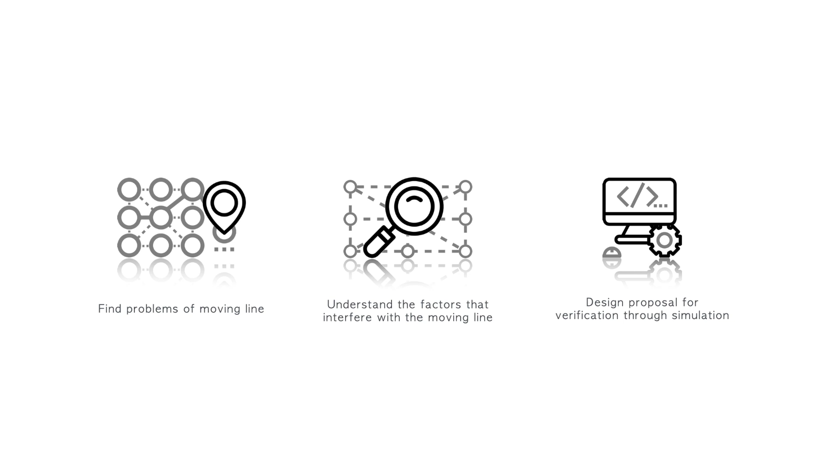The Taipei MRT station, which has an average of 308,000 passengers per day, is also the largest station in Taiwan. The underground second-floor interchange hall is our research base, which is the most complicated place passengers transfer often.

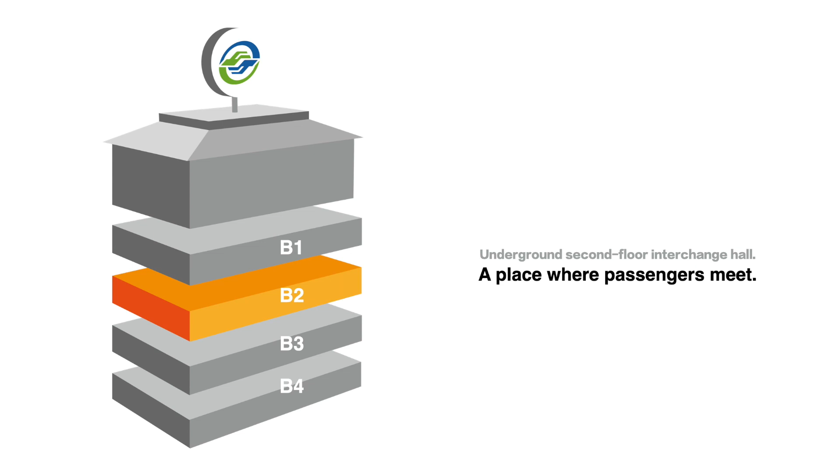Past studies found that there will be more conflict and interference in the 90-degree angle of the road. It's also mentioned that B2 has a higher flow density than the other floors of Taipei Station, so we choose this place as the research base.

This study tried to discuss passengers' moving line, hardware facilities and their transfer process and other environmental objects in space to explore the relationship between them.

Then discuss their transfer route from start to end point, with their reaction from interference behavior at B2 interchange hall. Based on what we observe, making some shunt plans by simulation to verify which plan is better.

As we know, the primary goal of passengers is to have a clear route and to reduce the interference of walking.

In MRT stations, we often see the use of shunt fences to guide passengers to walk on the moving line, to reduce conflict, but the ratio of space capacity to crowd flow should be taken into account to avoid queuing.

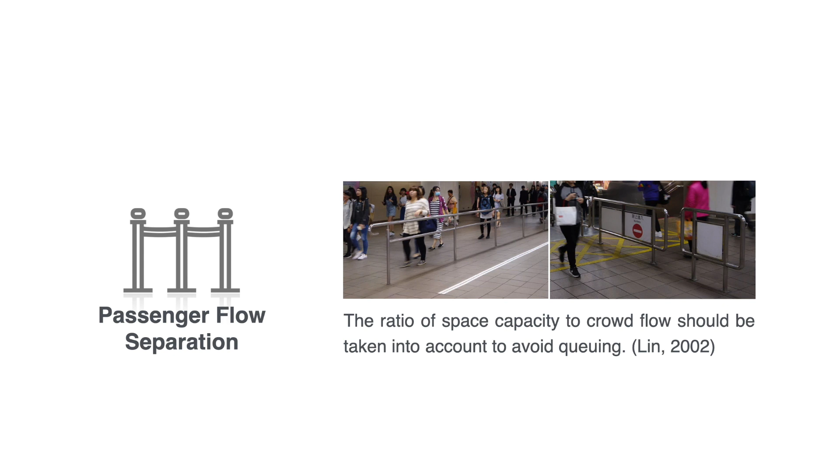In a crowded situation, pedestrians tend to choose the shortest route, but not the fastest route. Passengers try to slow down when disturbed in the same direction, and change their direction when interfered with from the opposite direction.

We used non-participant observation, choosing B2 of MRT Taipei Station as a base to observe passengers' routes during rush hours. I used a camera and followed each passenger from the start to the end point, observing how they walk along the way, where the disturbed behavior occurs, and where they end up. Total of 320 passengers.

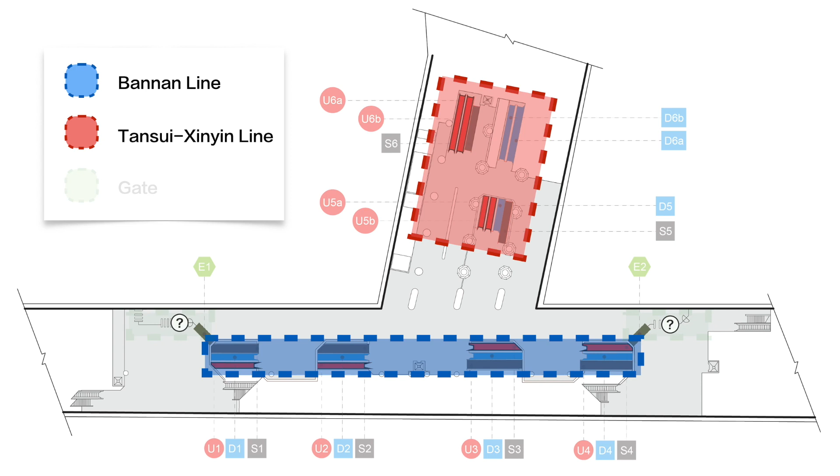The blue area is Bannan Line, the red area is Tamsui-Xinyi Line, and the two green areas are gates. We chose 6 start points: U1, U2, U3, U4 of Bannan Line, and U5, U5B, U6, U6B of Tamsui-Xinyi Line. Each start point has its own upward escalator.

The 6 endpoints all have a downward escalator: D1, D2, D3, D4 for Bannan Line, and D5, D6 and D6B for Tamsui-Xinyi Line.

Gates include start and end points. We use E to represent entry and exit gates as E1 and E2. Stairs are also endpoints: S1, S2, S3, S4 for Bannan Line, and S5, S6 for Tamsui-Xinyi Line.

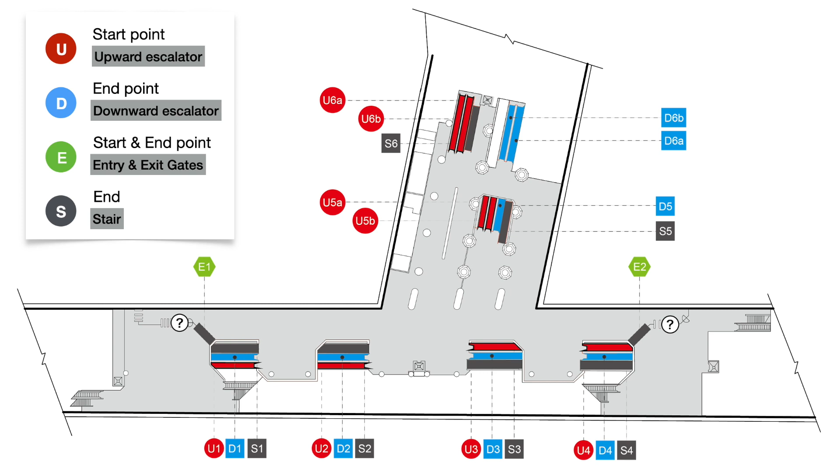So we did 3 non-participant observations as below, then tried to make 3 simulation shunt plans using Unity. Let me talk about what we found from the 3 non-participant observations.

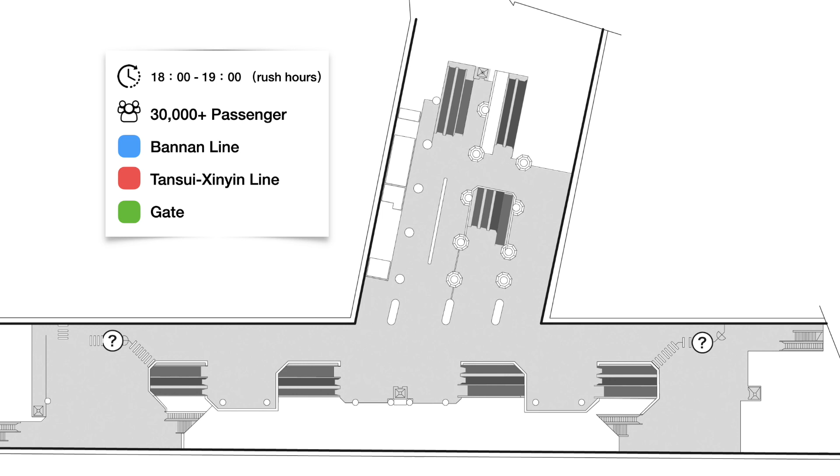When we observed passenger flow at each starting point, of the 4 starting points of the Bannan Line, we found that passengers are almost all from U2 and U3, where diversion is not good. At the start points of the Tamsui Line, the number of people at U6 is relatively large.

There was no difference between passengers arriving from E1 and E2. We found that U2, U3, U5 and U5B had flow of people lasting for a long time with short intervals. The crowds at U6A and U6B of Tamsui Line and ticket gates E1 and E2 were uninterrupted during peak hours.

The blue Bannan line has a single shift of about 300 people. The red one is the Tamsui line. When the crowds on both lines arrived at B2, they almost all overlapped, although the number has decreased over time. When passengers are shuttling between B2 at the same time, it will cause congestion.

So we found a significant difference of flow at the starting point of Bannan line. The crowds will overlap. At the beginning of Bannan line, the flow of U3 people is the largest. The largest flow of U6 people occurred at the starting point of Tamsui-Xinyi line. The larger the traffic at the starting point, the longer the duration of the flow.

Second observation is about choice of destination preferences and transfer moving lines. The first one is the passengers coming up from Bannan line to transfer or leave the station.

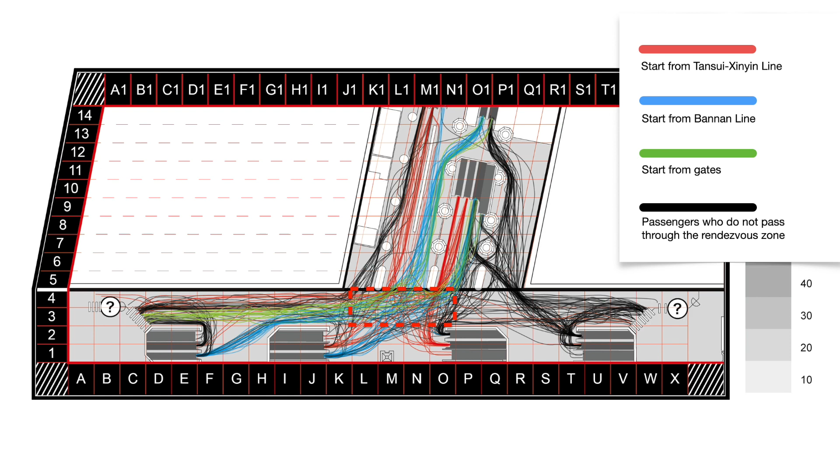Then we count the number of passenger movements and find out the areas where the lines are most interlaced. The darker color means more people there. The T intersection is the most complicated area with moving lines. After all passenger lines have been overlapped, we found that passengers in these two red areas would avoid T intersections.

We know passengers prefer to travel through columns to shorten walking paths and avoid crowds. Passengers departing from U4 and E2 are this type.

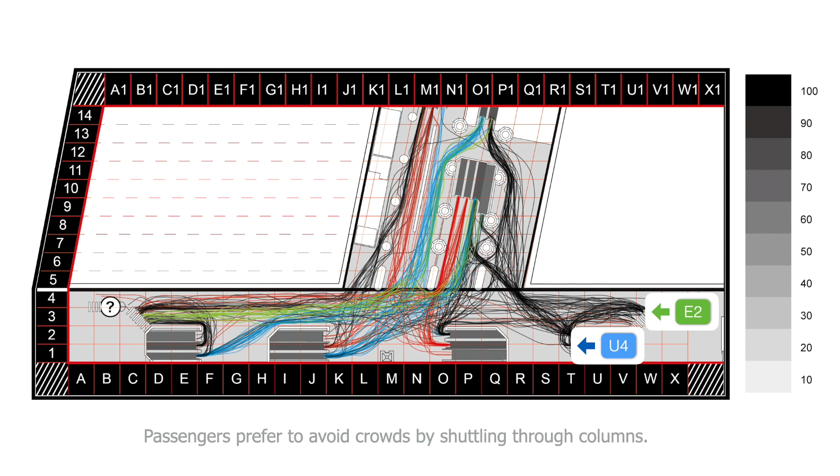If you look at the moving line from the source of passengers, the green line refers to passengers departing from gates, the blue line refers to passengers from the Bannan line, and the red line refers to passengers from Tamsui line. There is most conflict area.

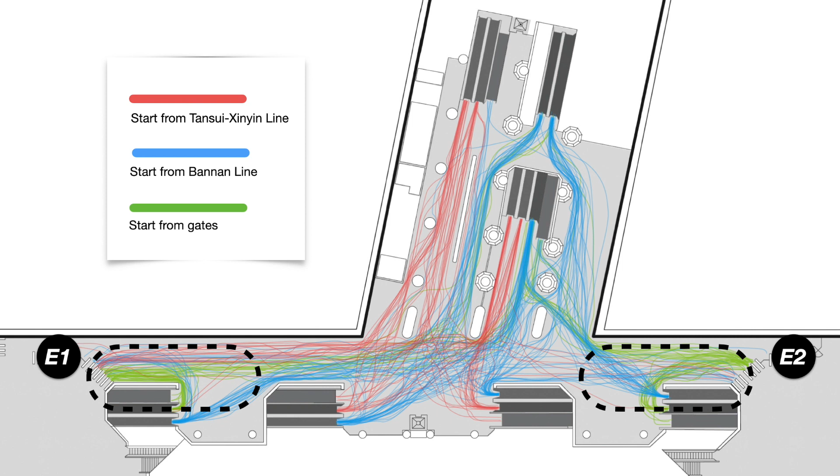The moving line of E2 is more chaotic than E1, and there is a path conflict at the corner. Similarly, in the black line at the corner, there is also an interlacing of the moving line because of different direction of operation of escalators.

So we found passengers choose routes with short distances. The T intersection is the most complicated area with moving lines intersecting. Passengers prefer to avoid crowds by shuttling through columns. The location and operation direction of the facility affect the moving line.

Third observation is about transfer behavior and distribution. When passengers encounter interference, they change their walking paths and slow down to avoid any physical collision.

The starting point U5 has the most disturbed behavior. The most disturbed behavior on the Bannan line is U2, because the starting point of U2 is near the T junction.

U6 is the least disturbed at the start of the Tamsui line, where travelers shuttle through columns to avoid crowds. Those who are departing from E2 are the least disturbed, because people from here don't go through areas that are jammed by moving lines.

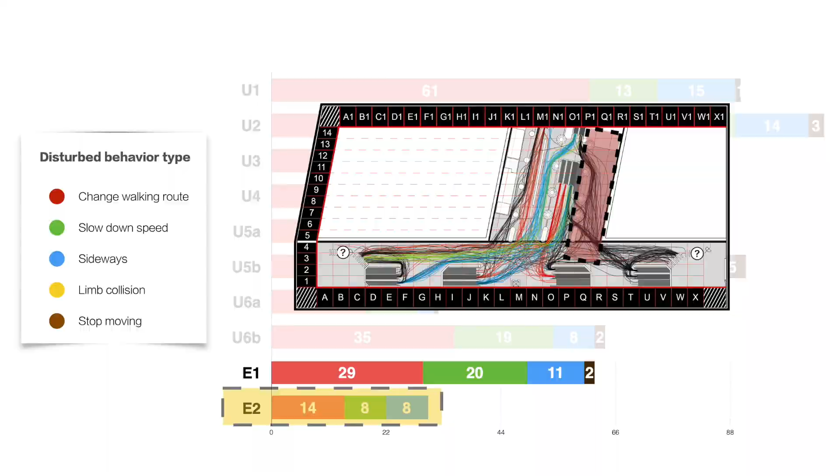If we overlap the 5 disturbed behavior types, it can be seen that most of the acts occur near the T junction and left and right escalator corners. The right escalator is disturbed more frequently.

So we found, when passengers encounter interference, they often change their walking routes. The number of interference behavior near the T junction is the highest. Passenger shuttles through columns to reduce interference behavior. T intersection, escalator entrance, and exit often occur interference behavior. The position of the escalator will affect the interference behavior.

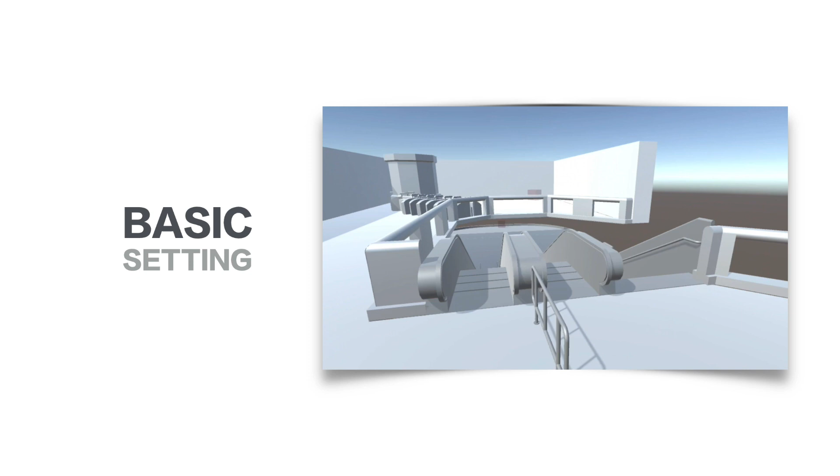After 3 observations, we did some simulation to evaluate any possibility to make it better. I used Unity 3D software to control the relevant parameters. We measured the size of the scene, restored the model of Taipei Station and then imported it into Unity. Then we set the parameters.

Speed setting of the escalator follows national standard rate and regulation. According to previous surveys, the parameters will be set based on the total number of passengers, the percentage of passengers at each starting point, and the interval between passengers taking the escalator.

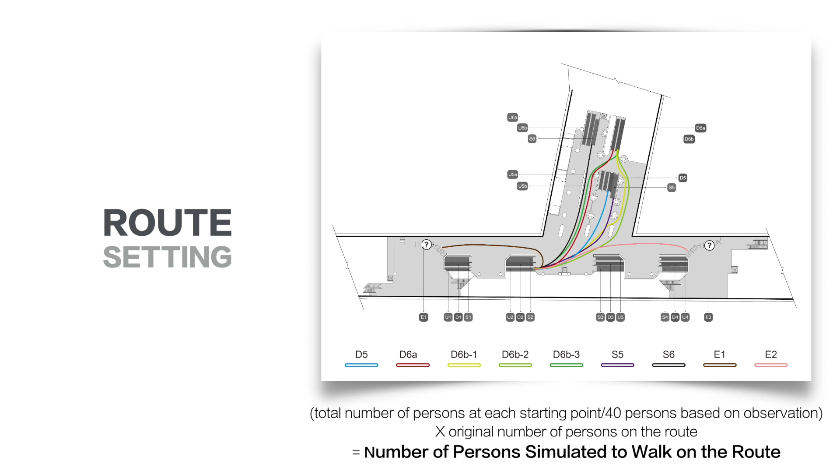Walking paths can be different for everyone. To simulate a traveler's path, we use this formula. Based on the observed route, the route range for a passenger is to use the same route that all passengers have traveled, then draw these paths in Unity.

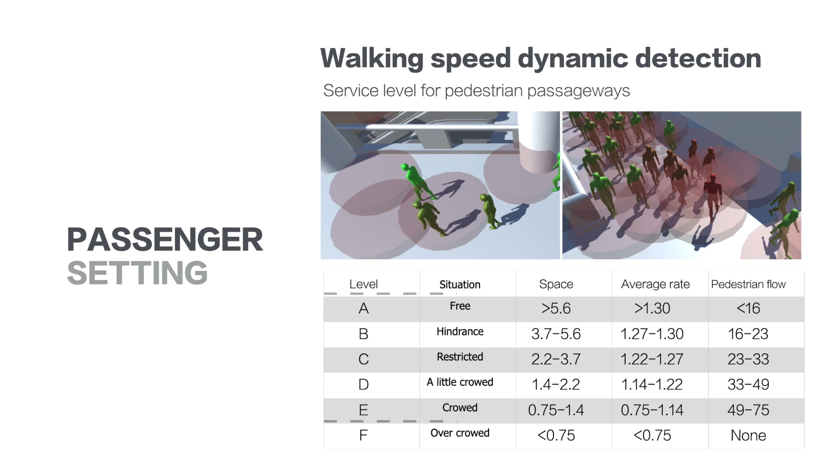How do we define pedestrian walking speed? We used service level for pedestrian passageways to make walking speed dynamic detection. If there's someone in range, the rate slows down. The average speed range of older and younger people is set to be different.

Percentage of passengers choosing to walk on escalators, stand on escalators, and take stairs is based on the simulated period. We know how many passengers have entered the station and transferred to another station, and how many of them at each starting point is also known, to make setting.

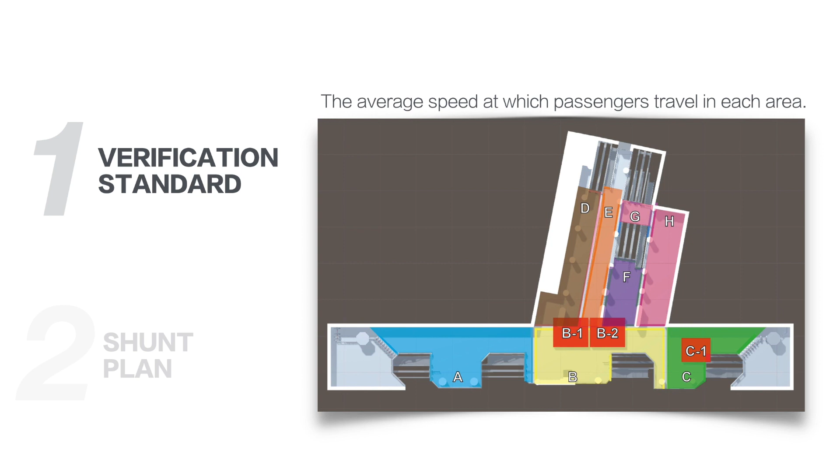The way we set the verification standard in shunt plans is by trying to know passenger travel time between each starting and end point, and the average speed at which passengers travel in each area.

We have 3 shunt plans. Plan A: change the route that interferes with the moving line.

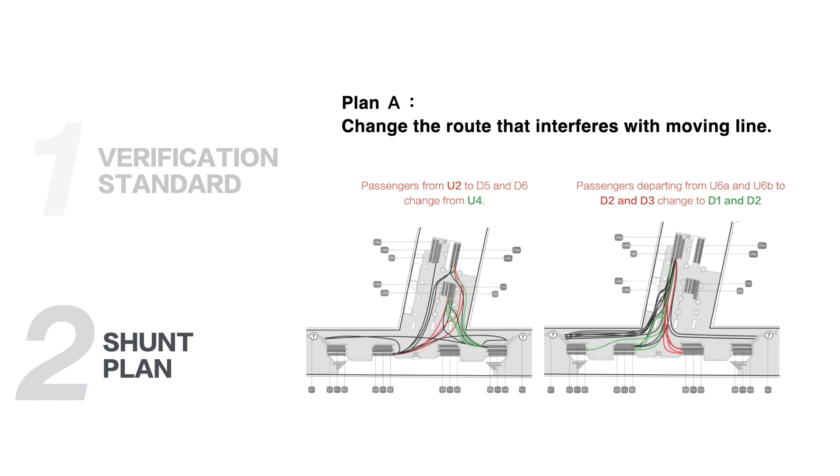Plan B: change the number of passengers at the starting point. The route is the same as Plan A. Bannan line has significantly different flow at each starting point, so we tried to average the flow at each starting point of Bannan line.

Plan C: change the direction of the escalator. I swapped the escalators for D4 and U4, as well as D5 and U5.

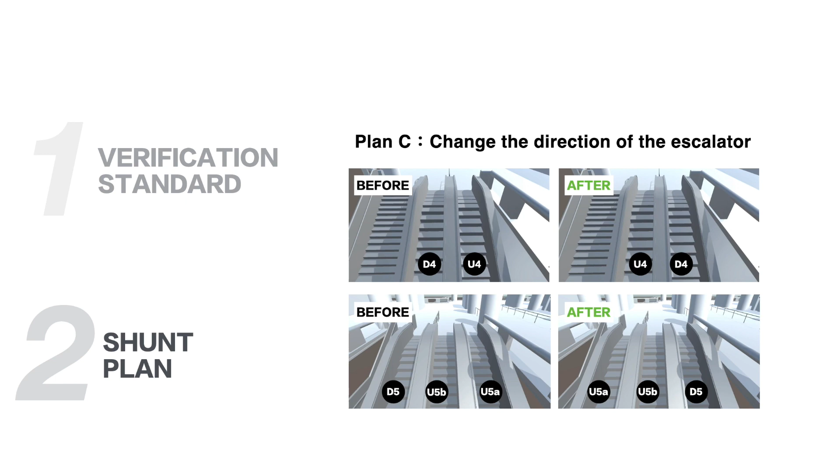Let's see the results. We used 2 viewpoints: the speed at which passengers travel in each area, and passenger travel time between starting and end points, to see how it works. Based on the observation, I also simulated a control group. We can see that the 2 areas, B2 and F, have the lowest rates.

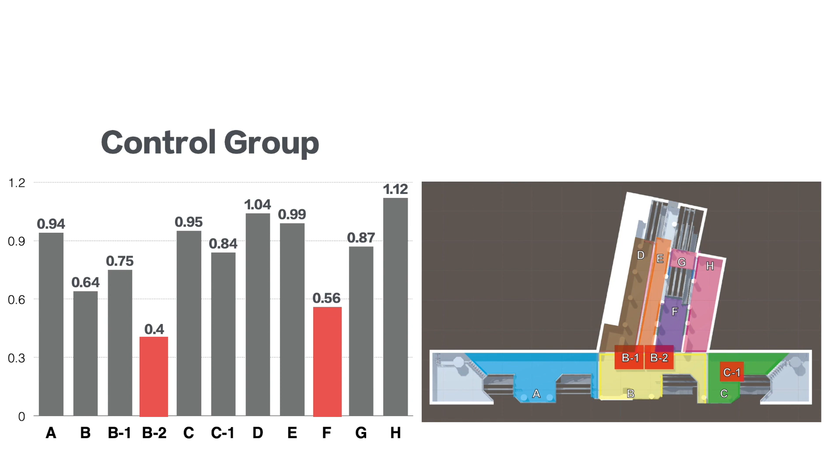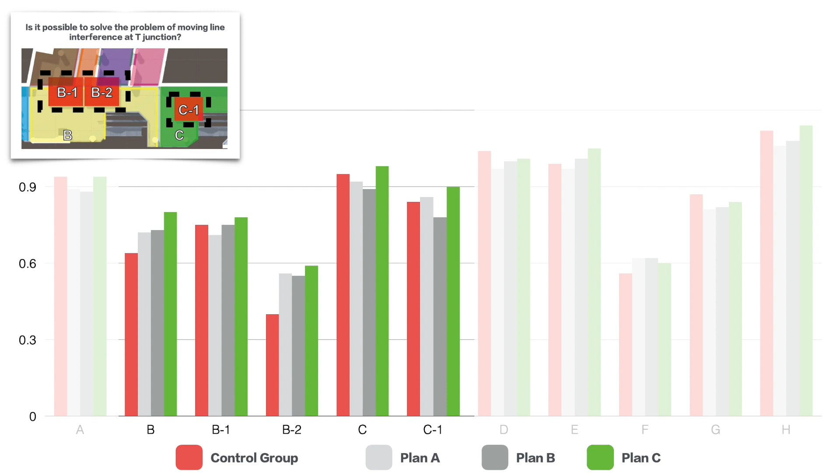When we compare the control group with the 3 plans, we can see Plan C has a higher rate of speed than the control group and other plans, which also means Plan C can solve the interference of the moving line. So we know the running direction of the escalator is the primary factor affecting the moving line.

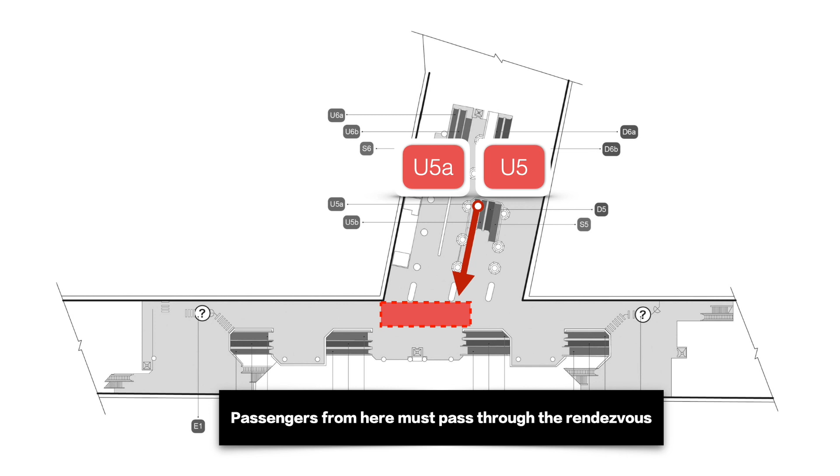Then see what happens with passenger travel time between starting and end points. Passengers from U5A and U5B must pass through the rendezvous area, so I focus on this area to explain what happens.

We try to compare the control group with the 3 plans to see how long they take between starting and end points. We found all plans can reduce the interference of the moving line. Plan C is the most effective.

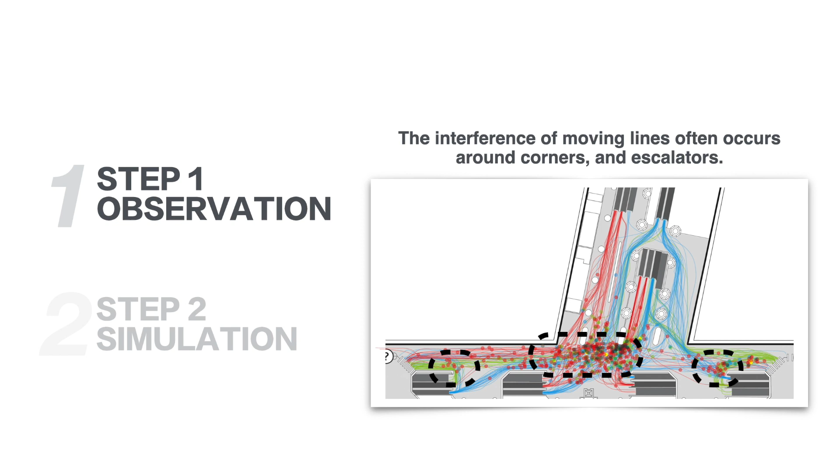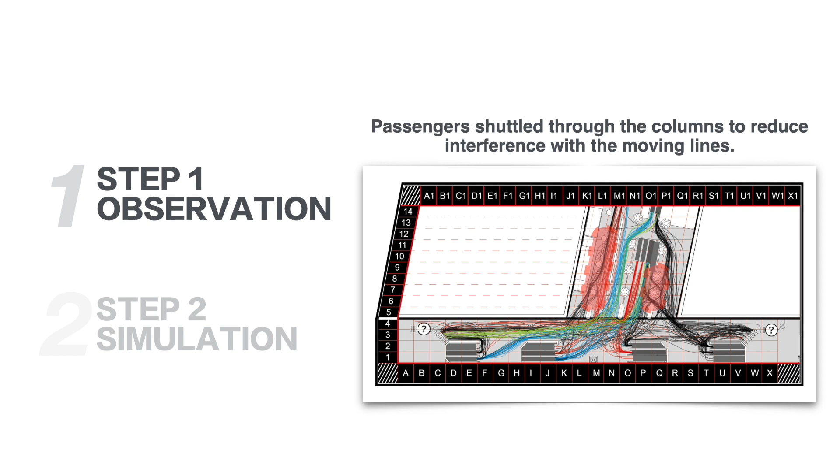So what did we find? Based on our observation, the interference of moving lines often occurs around corners and escalators. However, passengers often shuttle through the columns to reduce interference with the moving lines. In Taipei Main Station, they prefer to choose the route that is easy to move through, more than the shortest route.

We also found the running direction of the escalator brings a flow of people that affects the smooth running of the moving line. When too many flows are at a specific point, that makes it hard for passengers to walk.

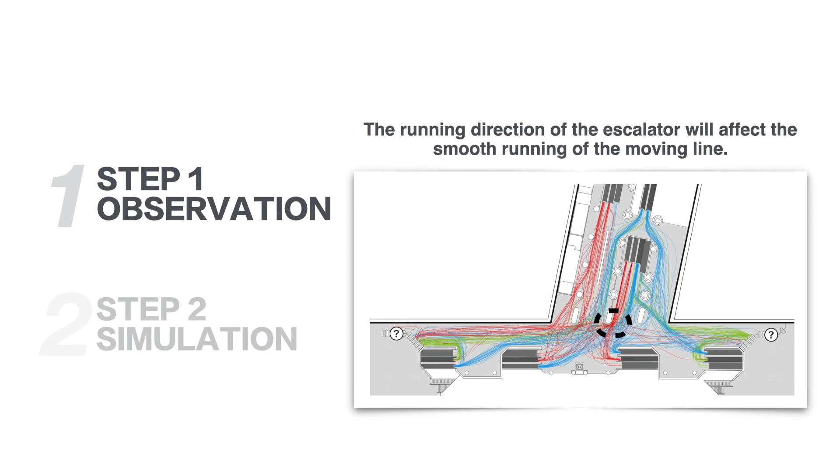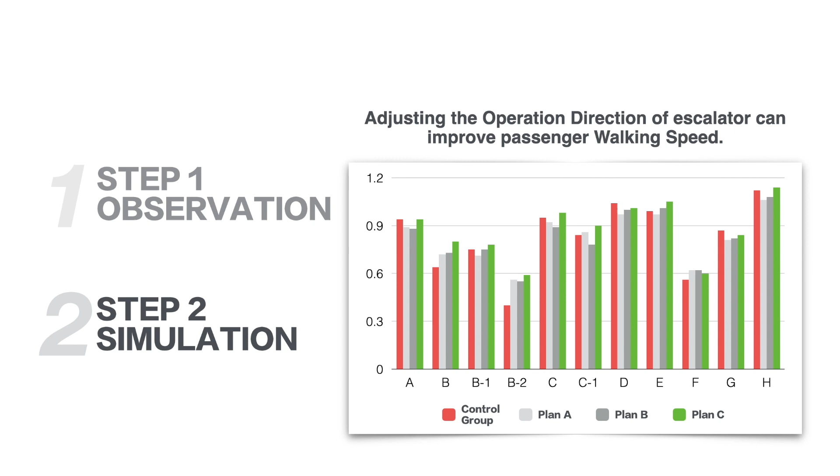Then, based on the Unity simulation, we found adjusting the direction of the escalator can improve passenger walking speed, especially Plan C, which is better than Plan A and B. All the experimental groups, Plan A, B, and C, can reduce the disturbance of passengers' rendezvous.

There are so many factors that affect passenger behavior at a station, like hardware facilities, passenger line, and flow rate. These factors also vary over time. I think a better way to manage it is to adjust flexibly to different situations. The use of Unity in this study is one way. I hope it can be used as a reference for further research.